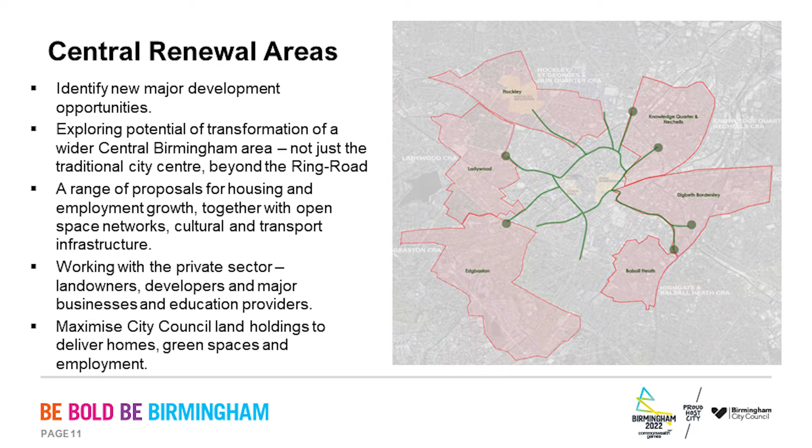Some transport connectivity there - as we allow people to drive into the city centre, we'll make it very difficult for people to drive between different parts of the city centre. So okay to drive in, we're trying to discourage that as well, but within the actual city centre we're really trying to discourage massively.

City of Nature - we've got a fantastic range of opportunities. We know we've got the waterways. We know in the past, for all sorts of reasons, we've not necessarily made the most of those natural assets. So a key tenet of the Our Future City Plan is making sure we're being very specific about those areas where we can encourage fantastic development in and around those pieces.

But that also includes things like food strategy, sustainable food strategy, the Brummie urban forest and initiatives like that. So it's a really rich document - there's a spatial element to it, but actually the stuff around it is the stuff that's really interesting. So I do urge you to go on, check it out, have a look at it, and engage with us over the next few months.

City of Centres recognises obviously that there's more than just the city centre itself, and it's important to make sure that we've got neighbourhood centres which are flourishing. This is touching on the concept of 15-minute cities, the idea that you can get to things you need very quickly and sustainably, making sure we're not just putting everything into the middle.

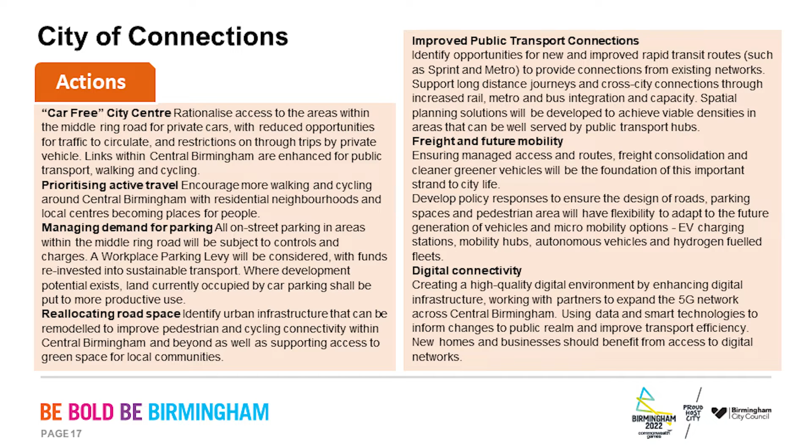And then City of Connections obviously starts to touch on many of the themes I've already referred to - around discouraging car use, investing in public transport, investing in cycleway infrastructure and so on. So some really laudable stuff here. You'd expect us to say all this, but I hope you've seen from the Big City Plan, for example, and other pieces of work we've done, that with a strong framework, especially at times where the economy falters and where things are uncertain, a strong framework enables other people to come in and fill that space creatively.

And then the City of Knowledge and Innovation recognises that we've got a really rich higher education, further education sector, and the business benefits that come from supporting them. So the Knowledge Quarter, for example, over beyond Millennium Point, is a really important area of focus for us through the Our Future City Plan, part of our economic development strategy.

And then the final one, really - and this is where the point around joy comes in - is the City of Layers, which talks about City of Sport, the Birmingham story, heritage, culture and creative zones, and cultural destinations. So making sure we're putting this stuff on an equal footing with everything else around economic development and connectivity, and making sure we've got joy in the city for people to flourish and enjoy.

So I would urge you to engage with the Our Future City Plan process. It's been really good to be part of it for the past 10 months or so. It's looking good, it's looking strong. I've got every confidence that it'll be just what the city needs to provide that framework and space for you all to do your thing, which I think is our role in the development of the city. But it does need your final input, so please do engage either with me afterwards through Q&As or online. Okay, so thank you. That's all from me.

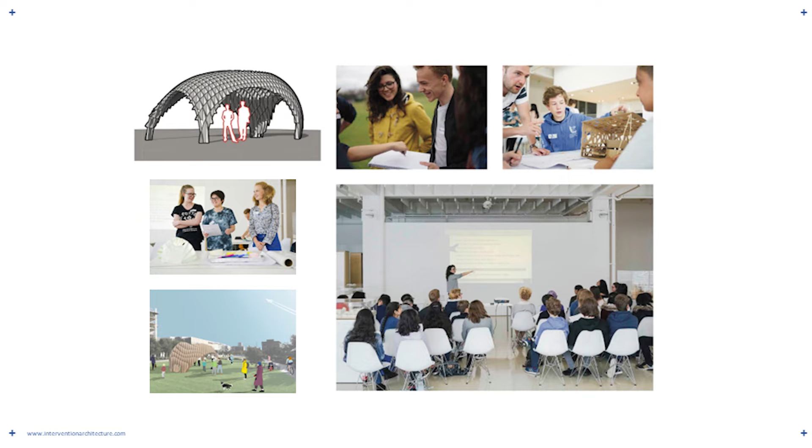We do this through a series of weekend workshops. We provide the children with a site and a brief - this one, for example, was outside Curzon Street Station, so we could have conversations about what HS2 means within Birmingham. A design is then selected and detailed by our team, and built by us as self-builds. Our hope is to facilitate their learning and encourage them to join the built environment, connect to their city, and make positive change.

We built, within our studio using CNC fabrication methods, this dry-jointed interlocking grid shell structure using parametric design tools. Even though this was entirely volunteering our own time, we got to test and research lots of methods which have been really beneficial as young designers. It's also enabled us to collaborate with interesting specialists and makers locally, and we've been able to offer some of the children work experience and links to apprenticeships within the city.

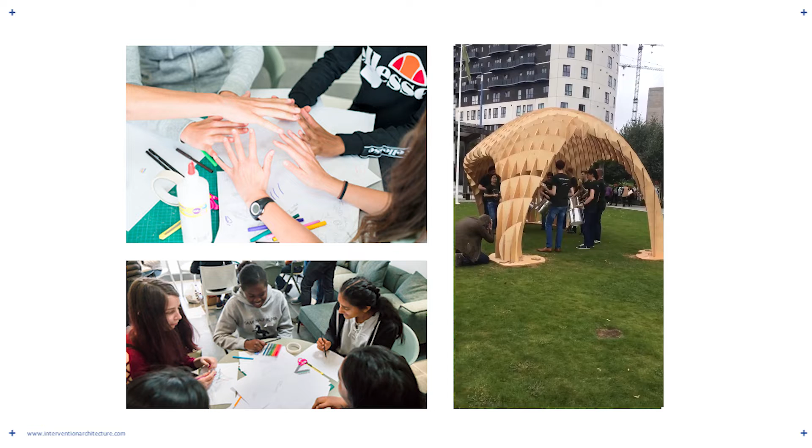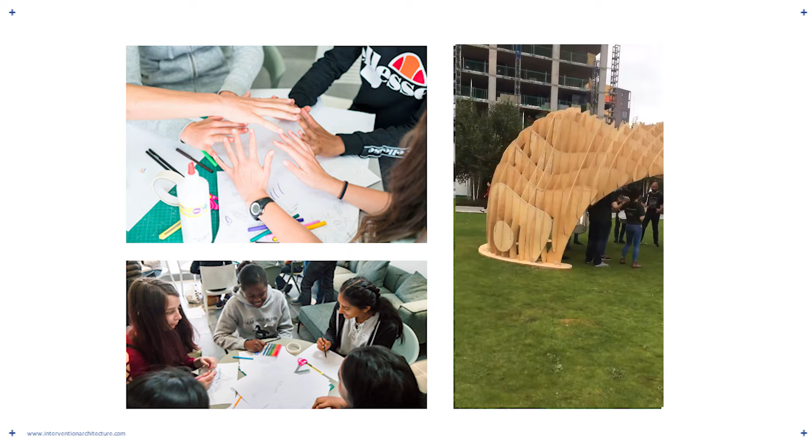I'll just play a small video of the pavilion - when we built it, it was used as a performance space for the Weekender Festival. It had quite an interesting acoustic effect, which was actually a happy accident in the design process.

The next project is part of a long-term collaboration with local artists as part of Grand Union - our peers in the Birmingham art scene. Ways of Learning was a three-month project where we created a flexible, shifting, modular construction to house artists' films, co-working space, and different kinds of events held locally.

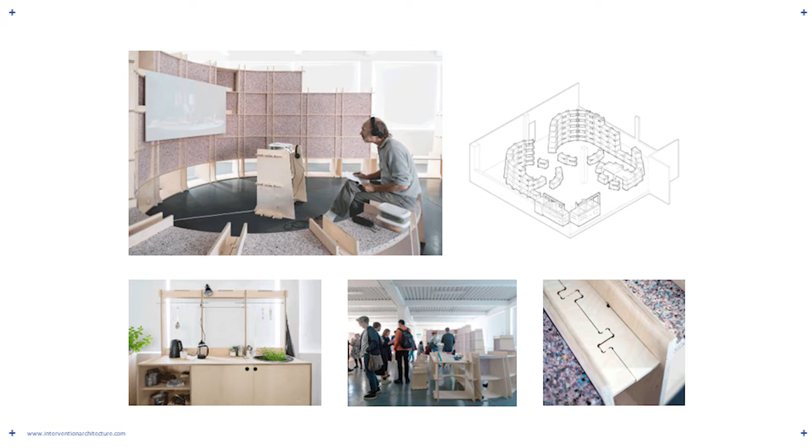This really introduced the themes of flexibility in design at any scale. Here we were building upon our CNC fabrication knowledge, using flat pack construction to create individual bays which, when connected together, create a variety of zoning, and also using recycled material in the form of reconstituted foam.

And it also kind of explored adaptability within the design, where it had an evening change of use to be a kind of DJ set rave, which also allowed us to celebrate queer culture within the city with the In the Pink event. And we did queer pickling in the mobile kitchen and several different talks and events.

This project also allowed us to connect with other cities, so the legacy of this one structure has moved up to the Baltic in Newcastle. It's also been used in a new feminist space in Nottingham, and at the New Art Exchange. So it's this kind of really organic, adaptive reuse of just one joinery type of design.

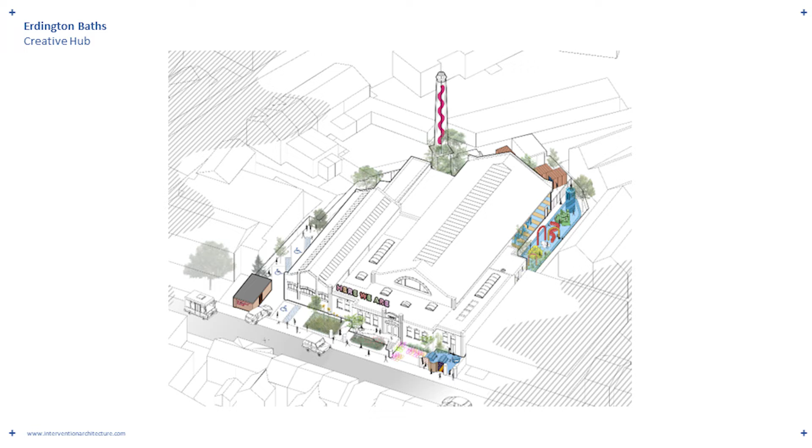This is Erdington Baths. We were really delighted to be selected on this project, and we've been working on it for about 2 years now. It's a Victorian baths in the heart of Erdington Centre, a redundant council site that lay empty for the last 15 years as a new swimming baths was built locally, and the site remained vacant. We've been working with Witton Lodge Community Association, an amazing team of people who had a vision to create new uses within the building space.

So we set about extensive community consultation and local business consultation to really understand the opportunities for growth and what this building could be reused for. We linked with a lot of the local creatives to really understand how this project could be a creative enterprise space that served the local needs of businesses and artists.

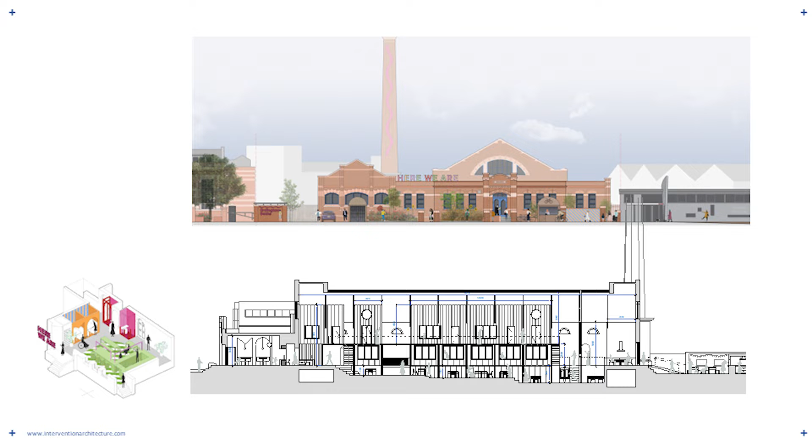We've set really ambitious zero carbon targets for it, and it's now going to be starting on site. We've got planning approval for this to be a mix of creative workspace and artist studios. We're reusing the existing pool structure to create different tiers of creative workspace. It's also going to include a community garden, a creche, outdoor play areas and street food.

And these are some images of the main internal pool space, where we're really using the way that the grade of the pool and existing ground line has allowed us to create levels of storage, studios and mezzanine, and then this outdoor street food area.

And then finally, this has been a really fantastic project for us all over this last summer. We were commissioned by Birmingham Cathedral with Arts and Heritage, supported by Birmingham 2022, to encourage well-being within the city by creating a structure. Our site was Pigeon Park, which is now a maker's Christmas market in construction. But we created a table to focus, to be at the heart of a kind of social activity throughout the games and throughout the summer.

So we carried out engagement on many levels. We did an open public consultation. We also then engaged in more focused ways with the cathedral staff, and in particular worked with people experiencing homelessness and Let's Feed Brum.

And it was a really humbling experience, and we really let them lead the design evolution, making decisions on things like colour, and whether there would be particular elements of the storage that we use for book exchange and performances.

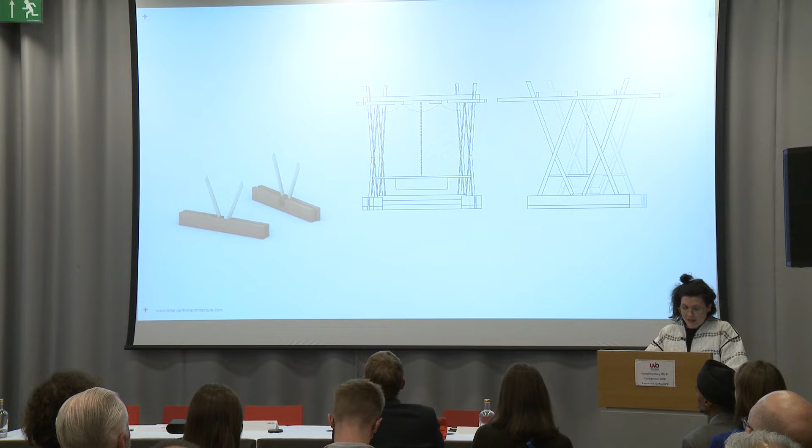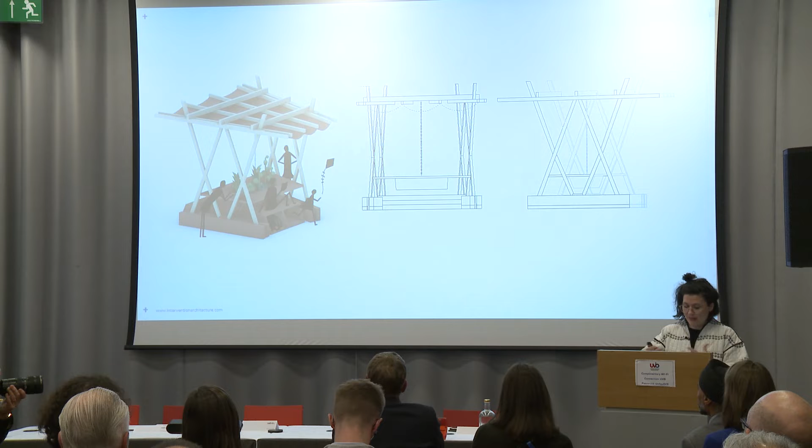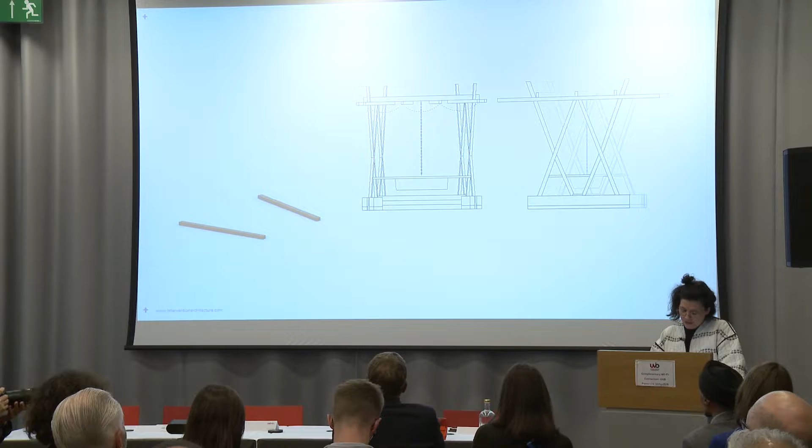So we started to develop ideas around environmentally led design using all natural materials. We created a surface-mounted structure, which was also a source of growth, with edible plants that would grow at the centre of each modular bay within the table. The plants were fed by water collected via a chain link, as water is collected along the top canopy. We also reused materials with railway sleepers as this anchoring weight to the whole structure, and created this soft communal arching shape of the table.

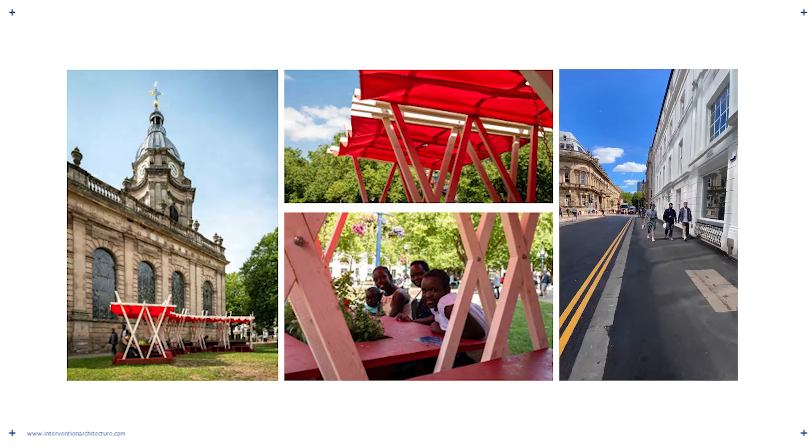The project's had a really interesting legacy, as each bay has now been gifted to local community groups. And I just thought I'd end by thinking back to how amazing the games was for Birmingham over the summer. This is a stop motion walk from Dav's site at Paradise through the city centre. We were really excited to be part of one of the really colourful, vibrant interventions which just injected so much life into the city in a new way that we haven't seen before. And we think that's a real moment for Birmingham to build upon. Thank you.

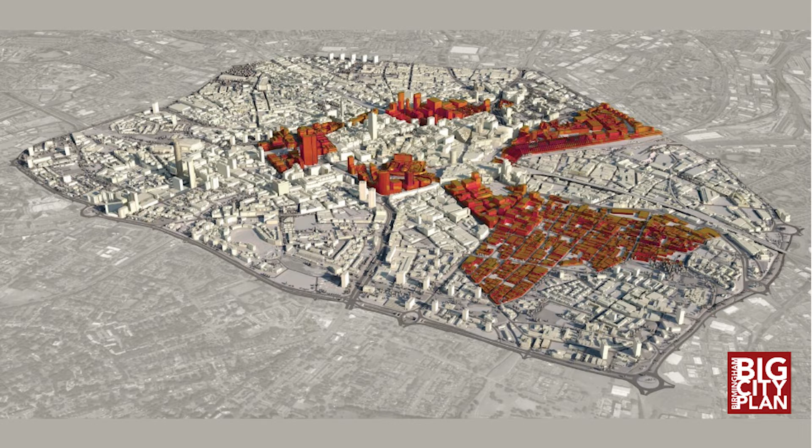Later on, Dav and Alexandra will be speaking about how to redesign complex sites and regenerate urban spaces within the city. Redevelopment is vital to Birmingham's Big City Plan core pillars: to improve connectivity to the city, grow economically, embrace cultural diversity, and support opportunities for innovation. With that, the city core can evolve.

However, what happens to our existing building stock? Buildings that were built 20, 30, 50 years ago, buildings that aren't necessarily listed but are pocket sites within the existing city centre core. Buildings that now are unfortunately falling short of design standards and aspirations today. Buildings that don't encompass the health and well-being of occupants, that aren't designed with inclusivity in mind, and that don't engage with their surrounding communities.

And even more importantly, buildings built with a fabric and MEP solutions resulting in buildings operating to poor standards.

The UK government announced that we would be net zero by 2050. From a numerical perspective, approximately 40% of the UK's emissions are attributable to the built environment, with construction, demolition and excavation activities generating approximately 60% of the UK's waste.

As an industry, we are well aware, or should be, that all new builds need to consider this when designing these buildings - that we need to reduce the energy demand, construct from low carbon materials, promote a circular economy, whilst also engaging with communities.

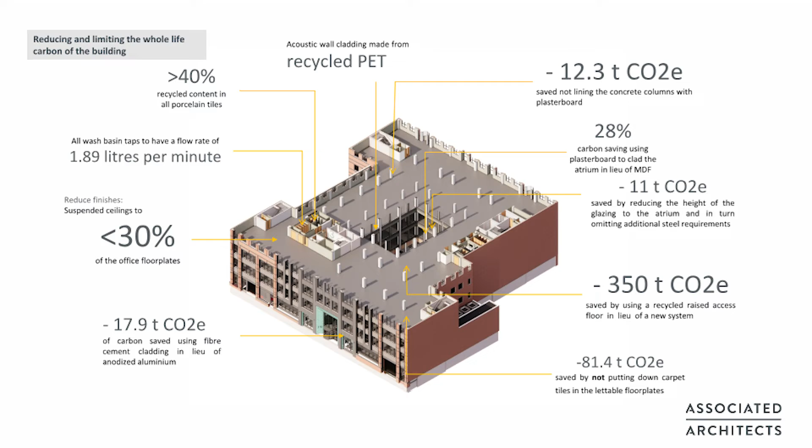Specifying wall tiles that had a minimum of a 40% recycled content, and floor tiles also, where possible.

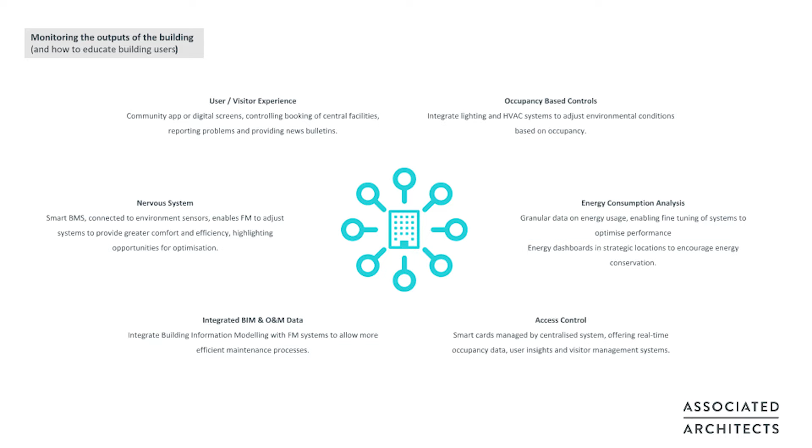As designers, we can do our best to design a building that is as sustainable as possible up until the point of handover. However, unregulated energy from occupants can account for 50% of a building's total energy use. And so there needs to be a fundamental change in the way we manage and behave in buildings if we are going to make a lasting difference.

As professionals in the sector, it's our responsibility to educate our clients and building users. We're addressing this at 19 Cornwall Street by creating a building handbook and tenant fit-out guide to help educate tenants. There'll be green leases which will impose certain obligations on tenants to buy into the building's net zero carbon objectives. And with the implementation of smart technologies, we can make people aware of the impact of their decisions.

Turning up the heating, turning up the air conditioning, leaving the lights on—it's all going to be openly displayed within the building on screens, so that people can be aware of their actions, in the hope that this engages with users and raises their awareness.

We're all for being more sustainable at home. I know, for instance, I've refrained from putting the heating on by putting a lot more jumpers on in the past. And that's what we need to encompass in all the buildings that we use—not saying there's no heating in there.

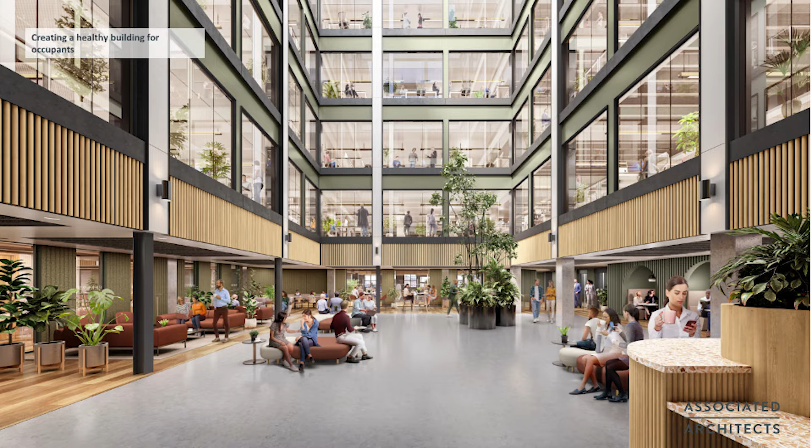So thirdly, how do we further integrate our buildings into our communities, office buildings for instance? So we create a people-focused design. We use behavioural nudges to encourage healthy actions.

At 19 Cornwall Street, we've positioned the cycle store at the ground floor with visible links through within the reception space. Traditionally, it may have been hidden away back in the basement, because this is prime net lettable area that the building owner could make money on. However, we've realised the importance of promoting sustainable transport methods and a sustainable lifestyle for the people in the communities.

We've prioritised quality design, and we know that people want natural light, legible routes through, and quality materials to feel comfortable. So using the softness of the wood, using the recycled acoustic panelling, just to soften the whole space rather than it being a harsh environment.

Then creating a community—so again, like with the cycle store or even the studio space that we've got at the back, which is a multifunctional space, the atrium could have been sold up as net lettable area again. However, having this open large space with the—what are they called?

The barriers to get through, turnstiles near the lift lobbies, mean that this is more of a communal space and occupiers can engage with other occupiers within the multi-tenanted building. We've also taken a conscious decision not to put a cafe area in here, to promote engaging with local independent coffee shops and restaurants around.

It was not until the 1960s when this was dismantled by the city's engineer, Herbert Manzoni, because at that time car was king, and we were the world's leading manufacturers in this industry. So he went about designing a city that prioritised cars over people and demolished much of our heritage. In some way, we should count ourselves lucky that the town hall was not in his way.

Post-war architect John Madin then followed this ambition through with his vision to reshape Paradise as a multi-level interchange destination. But only a fraction of that vision was ever realised, and the rest became a bit of a piecemeal disaster, resulting over time in becoming literally a big roundabout with a barrier to pedestrians from the west and the north. You can sort of see that collection of crashes and clashes that happened around there.

But fast forward to the 21st century, and it was clear at the start of this century that the population of the region was growing at a rapid pace. Though we were predicting growth in many other areas of Birmingham, we had a city core that was strangled and bottlenecked by the highways, and consequently we were losing out on development opportunities to attract new businesses, investments, and ultimately creating more jobs.

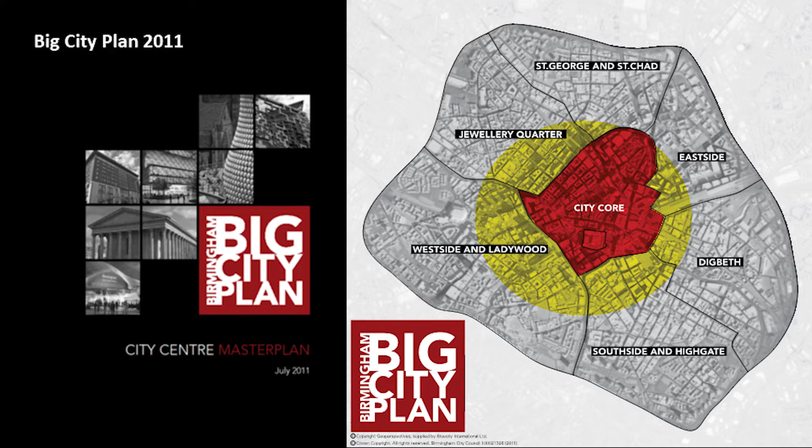Hence, we worked with Birmingham City Council to launch their Big City Plan in 2011, which set out a clear vision for unlocking the imposed city boundary and expanding beyond the inner ring road.

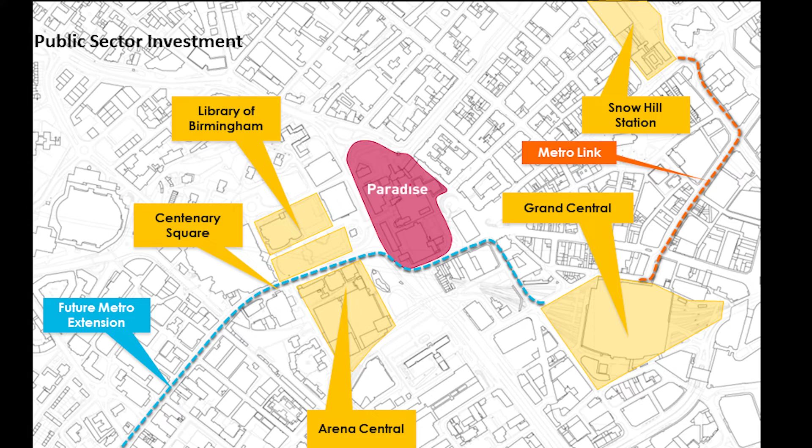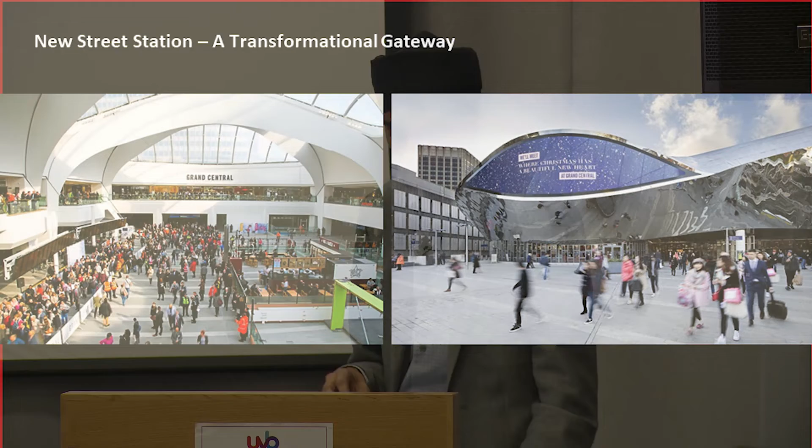This was helping everyone join and share a common, clear vision, and most importantly, kickstart public sector investment early on. In doing so, we were able to explore a more compact, sustainable-led city core with a safe and attractive public realm, starting to prioritise pedestrians over cars, as well as an integrated network of transport modes from walking and cycling to the metro. You may also remember there was a clear vision for movement and a sequence of infrastructure projects like the upgraded New Street Station, this new Library of Birmingham we're sitting in today, the repurposed Centenary Square, along with the metro extension to the west.

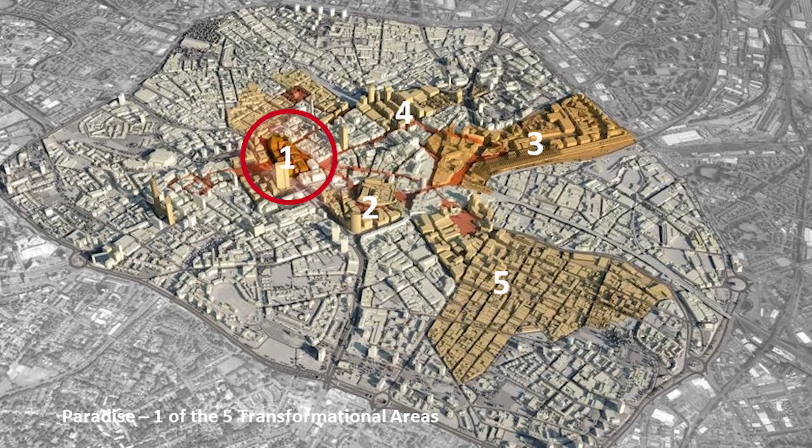Although it took many years, and caused a lot of disruption for us all, it did really transform the city from being a car-dominated city to being a people's city. At the same time, in the West End, Paradise was one of the five transformation areas identified for redevelopment to break down what we called the concrete collar.

Ultimately, this was about repairing and reshaping a pivotal piece of the city's fabric to optimise development through densification, together with safe, connected urban realm and modern workplaces. This was to either attract the expansion of existing businesses in our city or bring new regional headquarters into the city. So it was a strategic framework with a purpose to help deliver, number one, economic growth for the city and its growing population; two, safe, connected public realm for active travel and social and sustainable benefits; and three, creating jobs in professional sectors to retain the best talent this city can offer.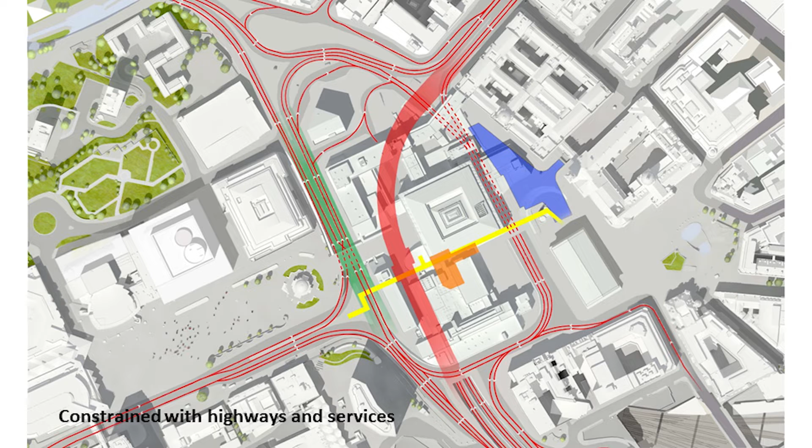Starting with the site, it was heavily constrained with highways sitting all around it and under it, as well as existing services. We also had to cope with 30,000 people walking through Paradise in a day, and keep the site in full operation with about 80,000 cars travelling under it through the tunnel. So it was a very lively and very active site we had to deal with.

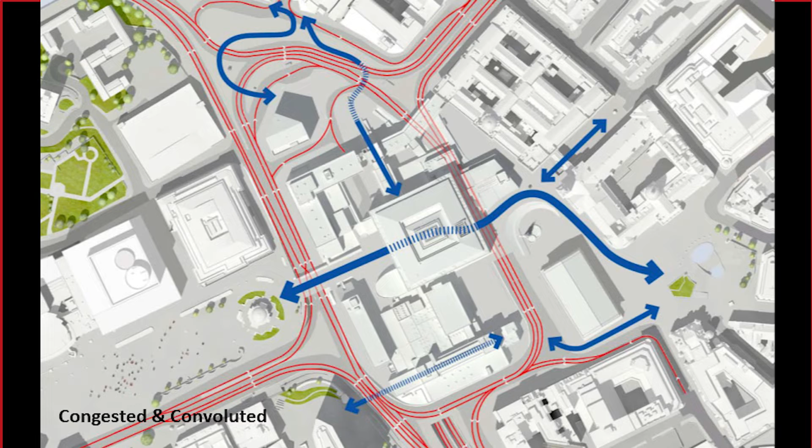This strategic site was pivotal, more like a pressure valve in the city centre, and therefore needed releasing to enable growth and expansion of the city, but more importantly, pedestrian and cyclist movement in a legible and structured way. This was also the prime objective of the Big City Plan. So we were working with the city to build on its long-term vision.

You can see some of these pictures showing the underpasses, the bottlenecks, the barriers, and a real complexity of people moving around in convoluted ways, with cars being separated from people, just being a very fragmented piece of the city's fabric.

A key and challenging part of its transformation early on was the removal of the eastern gyratory—the eastern part of the big roundabout. By rationalising the traffic movement and reducing car movement, we were able to reinstate the setting of a town hall with a new pedestrian thoroughfare, historically known as Ratcliff Place.

You can see this visual of how that would look when number 3 Chamberlain Square is built, and that connection from the metro going up to Chamberlain Square—you can see that piece of restoration. It also reinstated some historic thoroughfares, and in addition created new public spaces with people, connectivity, and a setting of our heritage assets in mind.

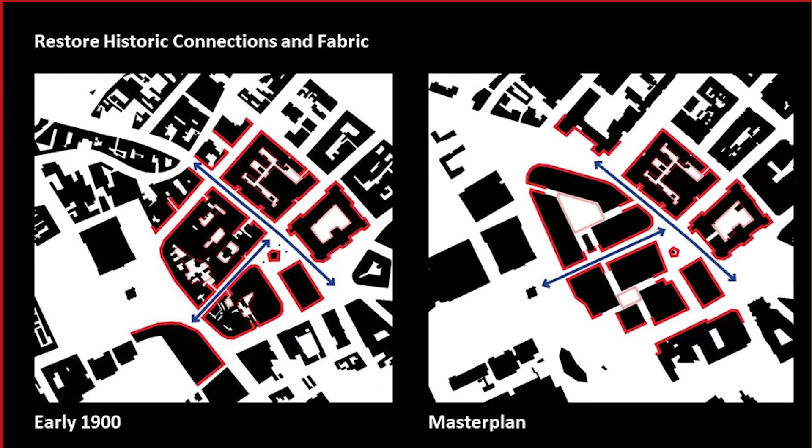It helped define streets, squares and edges, as well as connecting the city's two most important historic squares, where the civic setting around Chamberlain Square now meets the cultural hub around Centenary Square. So connecting those historical squares and adding more public space was the real approach underpinning the master plan.

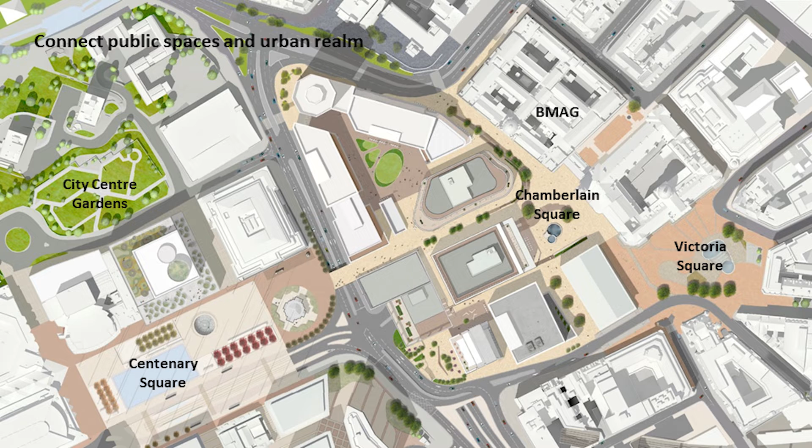The master plan also shows the main squares going from Victoria, Chamberlain, to Centenary Square, and that connection was really important to create legibility and structured movement around the city. The master plan was also about looking outwards, as this is where the true success of unlocking this part of the city would come from.

As much as the interconnectivity of streets and squares was important, the connections to other parts of the city were equally, if not more, crucial. In some cases this was reconnecting, but in most cases it was about new connections and supporting further opportunities beyond Paradise. That's where the success comes from.

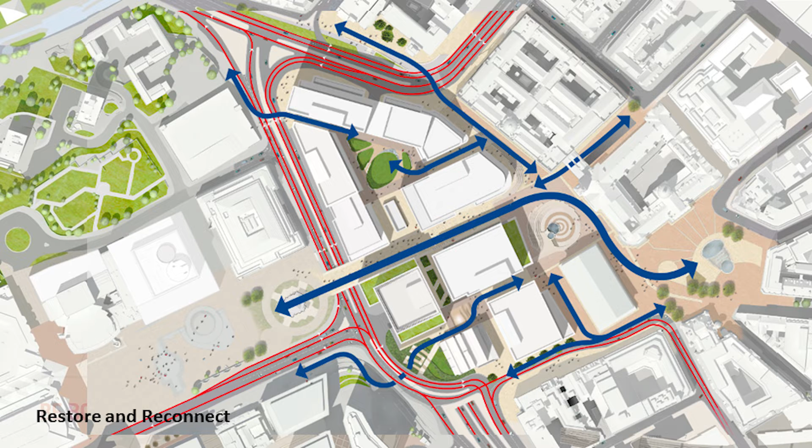About growing the city. So turning our back to any potential expansion of the city was not a choice for us. Connecting to the west, it opened up to Centenary Square and beyond to Five Ways. To the east, as an expansion of the Central Business District and Victoria Square. To the north, with a new level crossing over to the University campus and the Jewellery Quarter. And to the south, where the eastern gyratory has now been removed, connecting to the metro and down towards New Street Station.

Part of this master plan is also about the phasing, and this was absolutely key to delivering a master plan so it didn't feel like a construction site as we deliver this over two decades. It was also about making sure the best quality public realm came in early rather than at the very end.

So it was a bit like what I call open heart surgery, where we're releasing and managing footfall as well as activating frontages as each piece of public realm came forward.

Paradise is established in three key phases, with the first phase now completed, which many of you have hopefully experienced and enjoyed — redefining a much improved Chamberlain Square, with the new east-west connection being Centenary Way, also defined by the two new commercial buildings, Number 1 and Number 2 Chamberlain Square, as you can see highlighted in red.

The second phase, currently under construction and to be completed by 2025, defines the eastern edge of Centenary Square, with Number 1 Centenary Way, which is now up and hopefully delivered by the end of this year, with tenants moving in the middle of next year. That defines the eastern edge of Centenary Square.

It delivers two new public spaces to the south, Ratcliff Square and the Western Terrace out towards Alpha Tower, and also restores the tree-lined Paradise Street with the new metro extension. On the very northern tip is earmarked with the distinct octagon tower there.

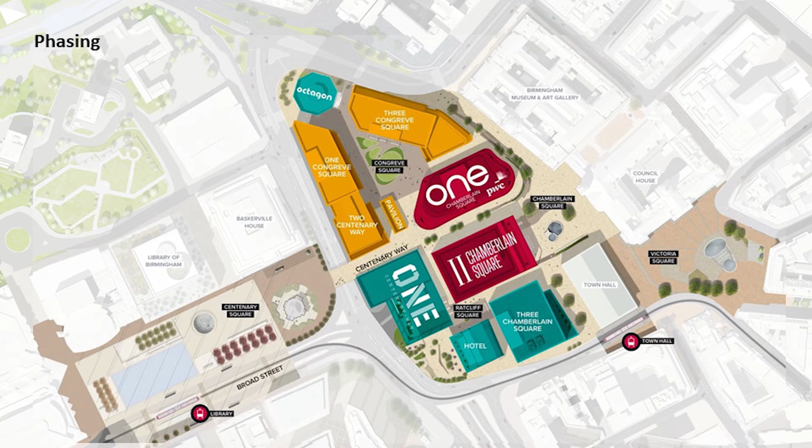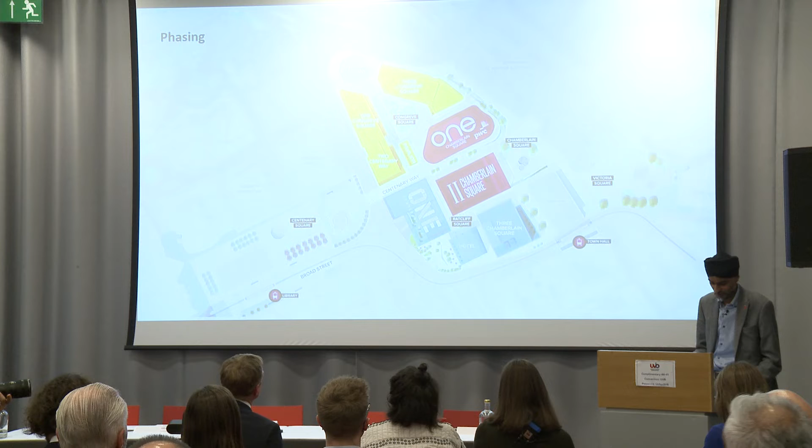Phase 3, ultimately marked in yellow here, infills the rest and adds the final piece of public realm with the northern Congreve Square. That becomes a soft landscape dwell space, all planned for completion by the end of this golden decade. So a 15-year master plan in the making.

The best collection of Victorian civic buildings outside London, as I've been told, once hidden amongst a jungle of concrete structures, is now finally being opened up to vistas and a civic setting that they truly deserve. In some way, the granularity and the purpose of this civic heart, once envisioned by Joseph Chamberlain, is being restored with people and public spaces.

So this is where I believe Birmingham has learned from its past to celebrate its heritage, but move forward with ambition and audacity. With the master plan principles and design codes defined — spaces, scale, materiality — we went about with design competitions to select our collaborative partners.

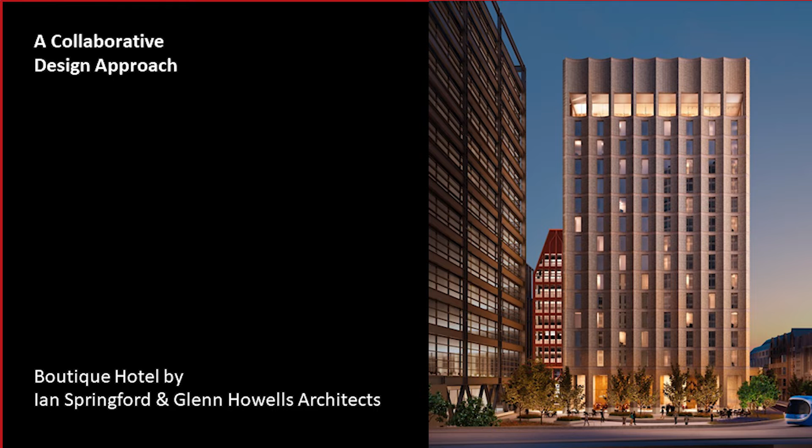We worked with Grant Associates on the landscaping, Eric Parry Architects on Number 1 Chamberlain Square as part of the first phase. For phase 2, we are partnering with Feilden Clegg Bradley Studios, who will be delivering Number 3 Chamberlain Square, and partnering with Ian Springford on a boutique hotel design that we are delivering as part of phase 2. This collaborative approach encourages the creativity of ideas and pushes the individuality of buildings, and that's really important for a master plan to bring together.

Of course, we were also involved with designing buildings ourselves. We're not going to miss that chance.

For the first phase, 2 Chamberlain Square is a delicate backdrop to its surrounding heritage and to the Chamberlain Memorial. The tall portico with its seven equal bays reflects the heritage, and the reconstituted stone palette material honours its historic neighbours, but with a contemporary interpretation.

On phase 2, Number 1 Centenary Way completes Centenary Square, spanning over the A38 tunnel. This black steel exoskeleton is a naked structure that becomes its strikingly clear architectural expression, working very hard so that none of its buildings are overclad with materials that would otherwise be seen as more embodied carbon and wastage.

And the architectural expression and the structure also shades the facade, so it has an environmental benefit to it as well. It will also soon be home to the engineers who designed this, Arup, as they return to the city with a strong 800-plus workforce.

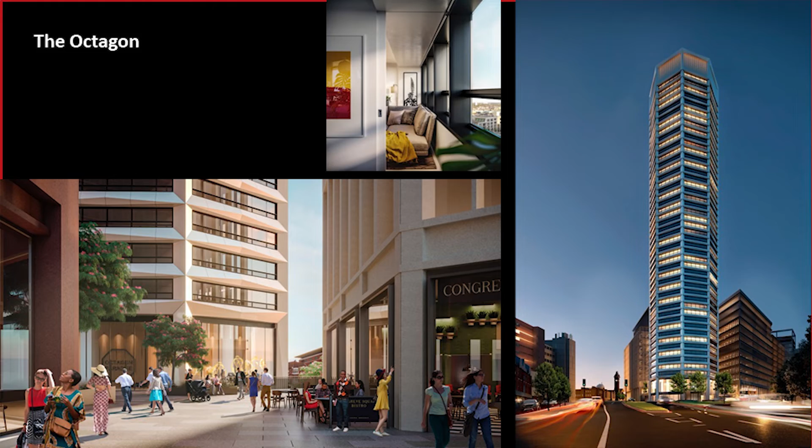The flexibility of this master plan also allowed us to add new uses to the mix. Though it remains commercially led, the later introduction of high-rise living known as the Octagon has brought further variety to this mixed-use development. As I've been told, this is the first of its kind in the world, providing homes with aspects probably twice as wide as you'd find in any conventional residential scheme. So it's breaking new ground in that.

And though each building is unique, they form part of a collective family that complements their heritage neighbours, contributes to civic quality and the character of the space. The range of ground floor uses among entrance foyers, generous porticos, and spill-out spaces all help animate and populate the new public realm.

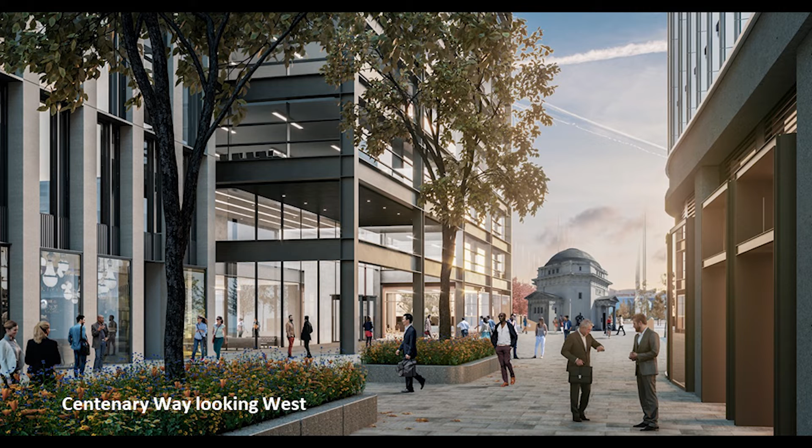Being in the library, looking west out towards Centenary Square before, and what it will look like by the end of this year, early next year, with that view of the memorial and beyond to the Symphony Hall.

And despite the pandemic and the initial reluctance to return to the office, this transformation has also attracted huge commercial success to date, with best-in-class businesses like PwC, Goldman Sachs, Arup and DLA Piper, to name a few, who have moved here to attract and retain the best talent that Birmingham can offer.

And when completed, by the end of this city's golden decade, it will provide up to 2 million square foot of workspace, in addition to homes, leisure and retail uses, all generating up to 12,000 new jobs.

The ground floor occupiers are equally, if not more, important, and have been carefully selected to help animate and expand the city's food and beverage offer, seeking to reflect world-class multicultural cuisine. And there's still lots more to come with experiential dining, so do keep an eye out for new announcements that will be happening soon.

But look, I truly believe this transformation from a dysfunctional, embarrassing piece of the city to now being regarded as an international, Instagrammable destination, as I've been told, has restored the city's belief and confidence. Once regarded as a workshop of the world and a city of 1,000 trades, Birmingham is not afraid of grafting, working hard to regain its global importance.

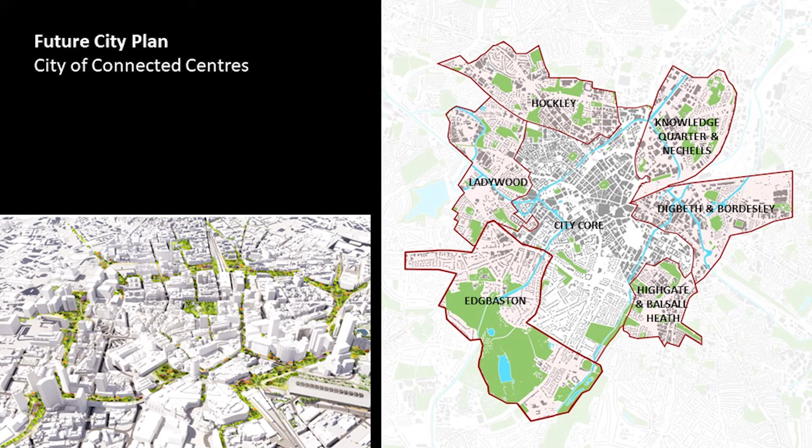And on that front, we are continuing to work with Birmingham City Council to go beyond the objectives of the Big City Plan, which has served its purpose over the last decade. As Paul mentioned earlier, the sequel to the Big City Plan, the Future City Plan initiative, is now well underway, looking to unlock further potential beyond the Middle Ring Road to neighbouring local centres and communities, with a vision for the next 20 years - guiding the city to finally deliver on its 800 hectares of opportunities, connected with multiple centres and 15-minute neighbourhoods.

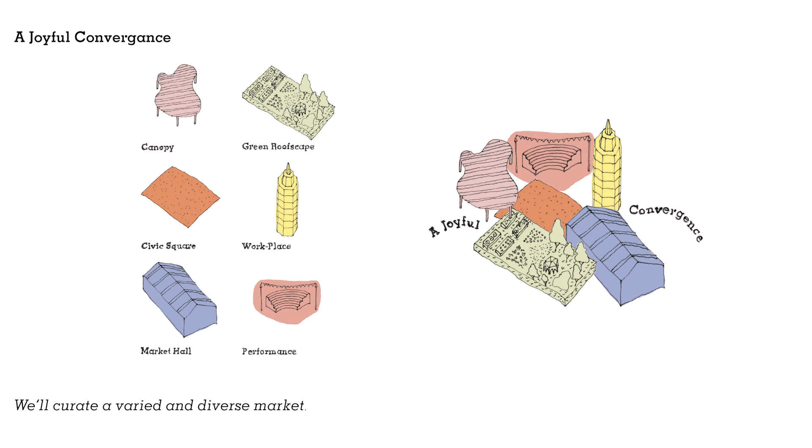The idea was to work on what we call the charrette method. Charrette stands for market cart in Old French, but in architectural schools it represents an intense period of collaboration amongst different disciplines. And the result, rather than being a building, is a piece of city which combines the different elements together, or what we call joyful convergence.

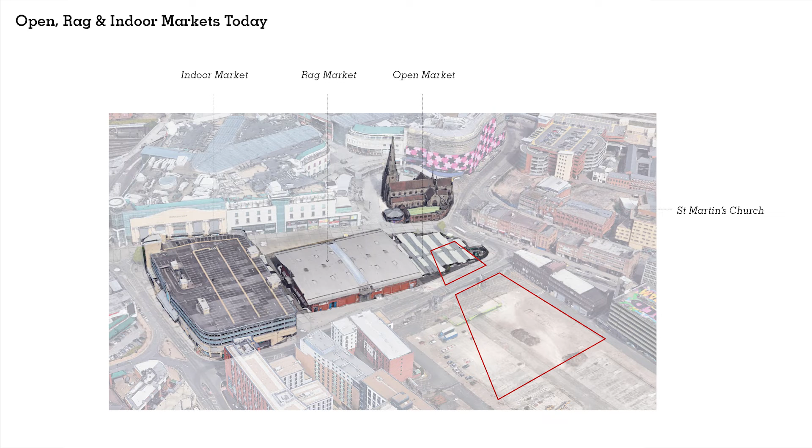The site, as you know, is in the Bull Ring area, which currently has the existing market occupying 3 different areas, 2 of which are indoor, and then the open market outdoor. So the fish and meat is in the indoor market, and there is the rag market and the fruit and vegetables outdoor.

The new site is adjacent to the existing site, and the idea is to combine the markets under one roof. I will show a diagram of that later in the presentation.

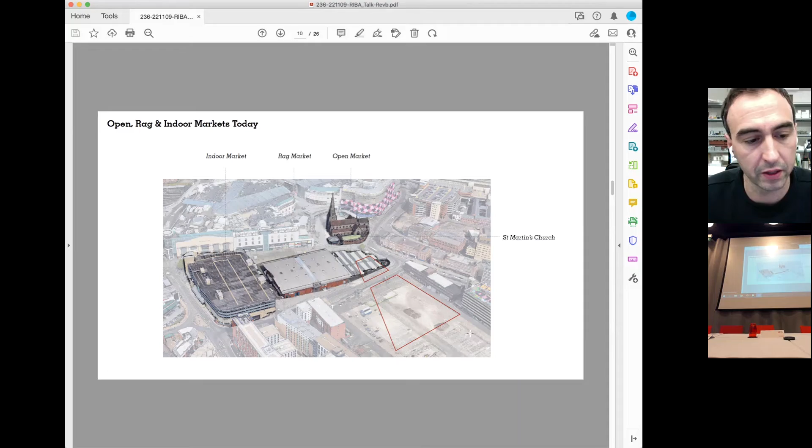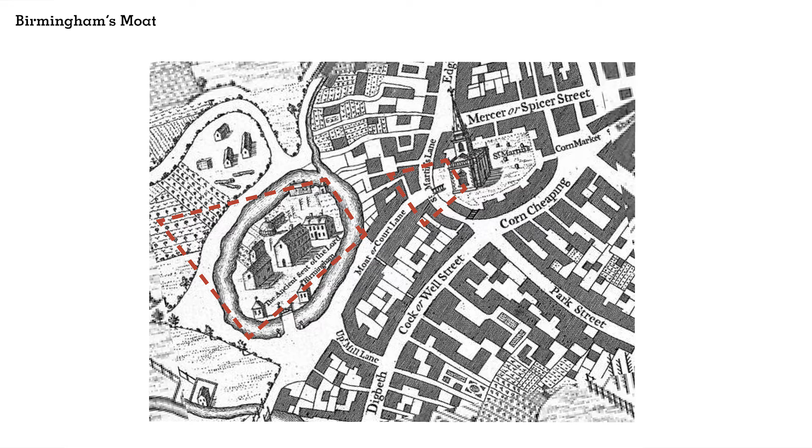Through the research we've done at the beginning of the project, we discovered the site was originally occupied by the first Lord of Birmingham, and the site included a manor house and a moat, which was at the time outside the city walls. As you can see on the top right is St. Martin's Church, which was there already in the Middle Ages.

This archaeology has been part of our design proposal. The idea is to celebrate the history of the site through some artwork.

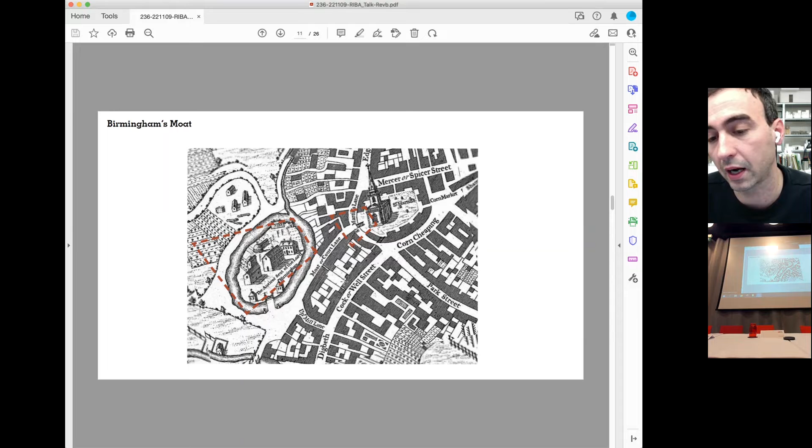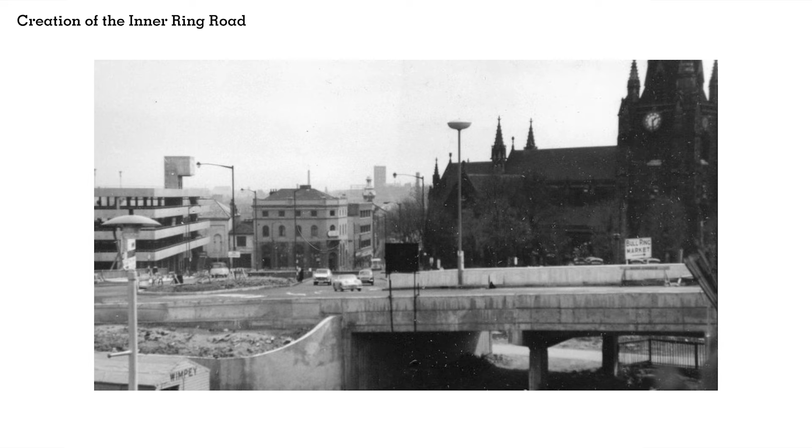The north part of the site, the Bull Ring, was heavily bombed during the Second World War, and on the south, at St. Martin's Church, it was redeveloped during the 60s to make space for the inner ring road, as you've seen in the previous presentation about Paradise Square.

But the first time I was on the site, it was quite clear the contrast between the north part of the market, the Bull Ring, which is a successful mixed-use development, and then this sort of emptiness of the site, which was occupied by the wholesale market until 2018, when it was demolished and relocated outside Birmingham.

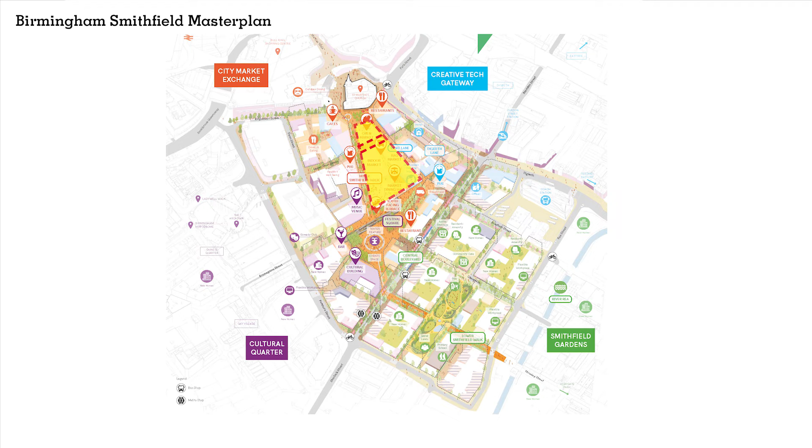As mentioned earlier, the site is part of a bigger master plan led by Prior and Partners to get client Lendlease, and the master plan aims to reestablish the dense network of streets and city fabric, which was destroyed in the 1960s, and put the market plot, highlighted in this slide in yellow, as the center of the master plan, facing St. Martin's Church and creating a square called Market Square.

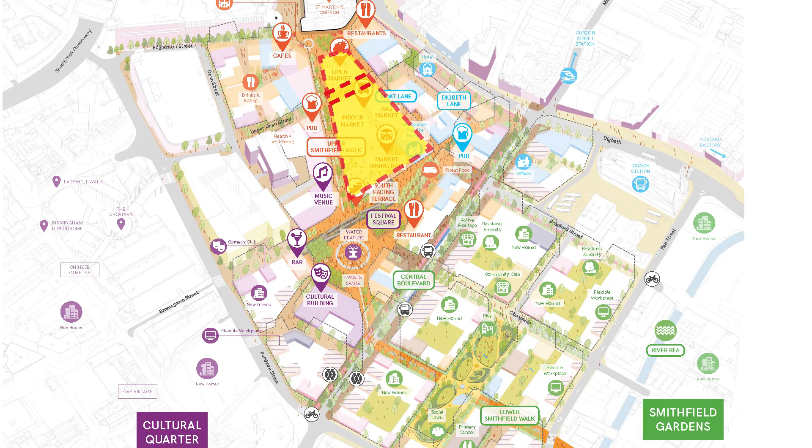And then on the south is a large space called Festival Square. So as you can see already from this master plan, it's a very public building with all very different conditions on the four edges of the site.

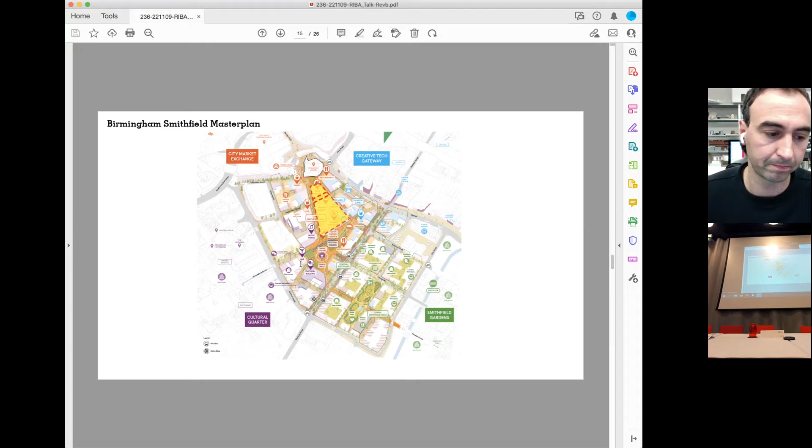As I said, the brief called for the markets to be combined in one building. So we will have the open market with fruit and vegetables in a very similar location where it sits now, on the north side of the site. The rag market and the

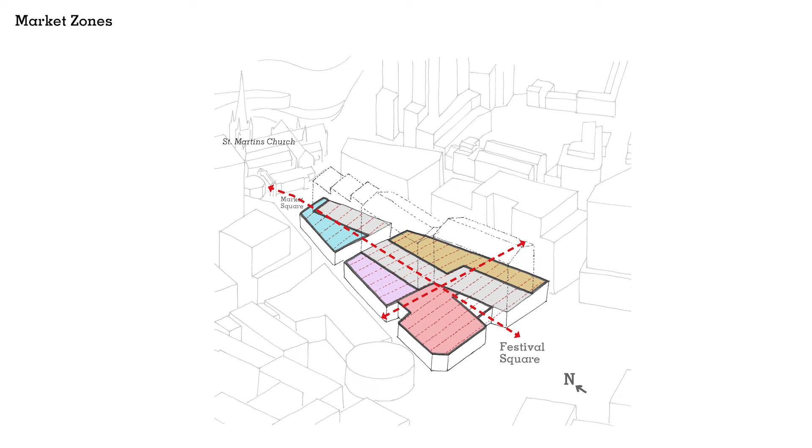fish and meat market, indoor market, on both sides of the building. And then there's a new element, the food hall, which through our research and discussion with the market specialist has been clear that the food offer in markets has been very successful, helps the footfall and attracts new customers. So the food hall will face Festival Square, and it will be a triple height space with an urban farm. And on top of the building there will be a public garden, accessible from Festival Square and accessible to the public.

The market will occupy the ground level. On top of it will be an office building, which is 7 stories high above the second floor. And then there will be a smaller building on the north, which will have workshops connected to the market, and then an event space on the top level.

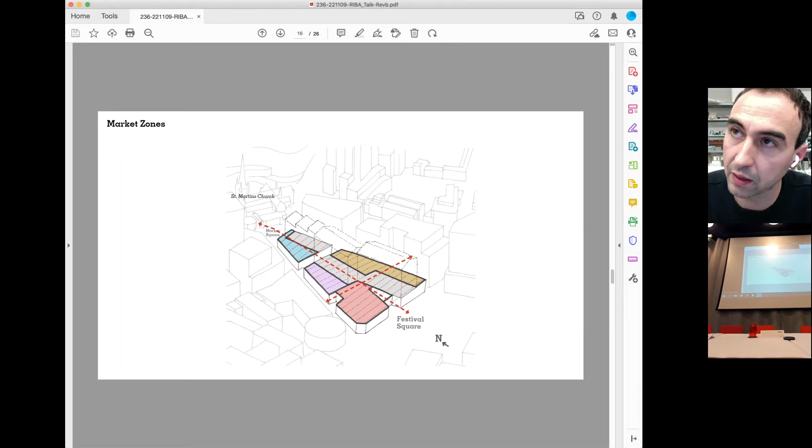In terms of team, as I said, we had a big team, 10 people. As you can imagine, market is not a very ordinary typology of design, so we had to prepare a brief with the client and with our design team, and I think we managed to do that thanks to all the consultants.

Eastside Projects, the local art organization, played an important role in that—I would say a fundamental role. They had two main roles. One was to create an art strategy for the project. The idea, since the beginning, since the competition, was for the artwork to be part of the fabric of the building, and to be part of the design of the building.

And the idea is that the artwork and the related signage aims to amplify the existing cultural and social ecology, and embed the heritage and cultures of Birmingham. Another role that Eastside Projects covered was to aid engagement with the existing traders and customers of the market.

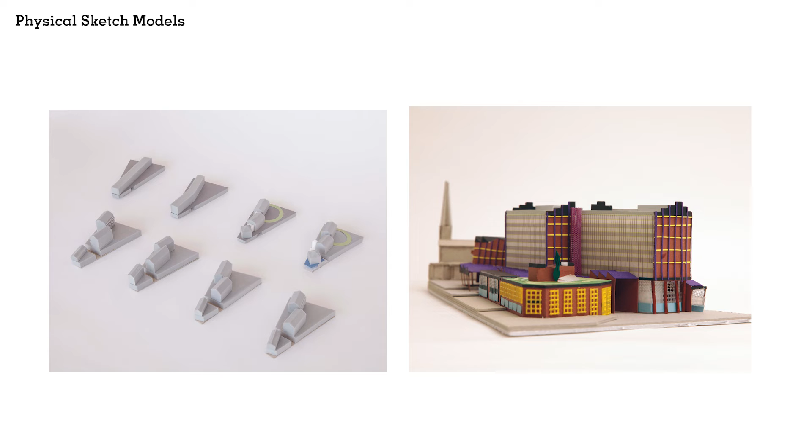And this was translated into different intense meetings, like charrettes, and we used a variety of media to represent that. We used BIM, but also model making, which went from a small scale to explore the massing, and then later on the facade. We had a model at 1:50 scale, which occupies the whole of our meeting room here in the office.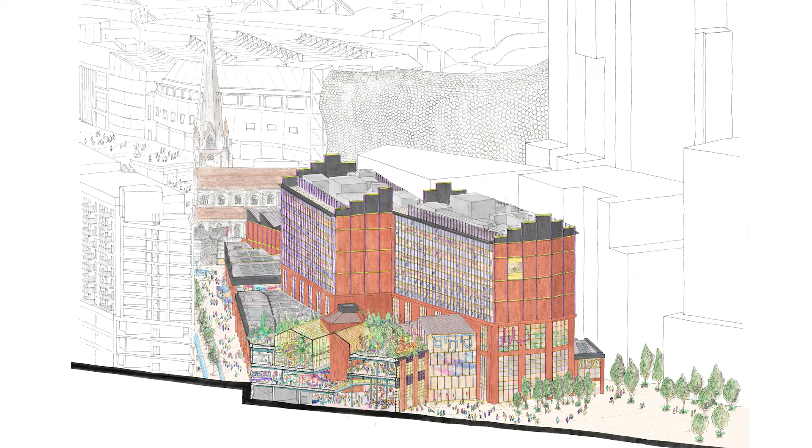And then further down, going towards Festival Square, which is at the bottom of the drawing, is the fish and meat market, and a section through the dining hall, which is a triple height space, with the urban farm, and on top of the dining hall, a representation of the landscape. And then on top of the market hall are 2 offices—2 buildings, which is one in plan but looks like 2 blocks, which have been shaped and located to not interrupt the views from the Bullring towards Festival Square and the rest of the master plan.

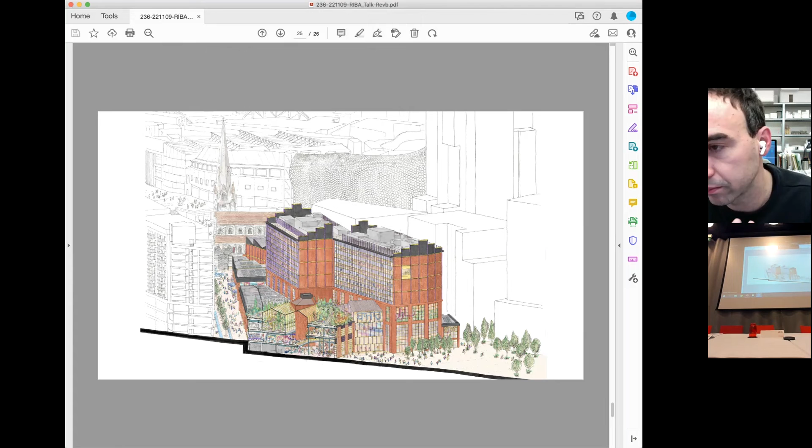So we are quite pleased that this complex project responds to its context, and the different elements of the brief come together as a piece of city which celebrates diversity and Birmingham in general. Thank you.